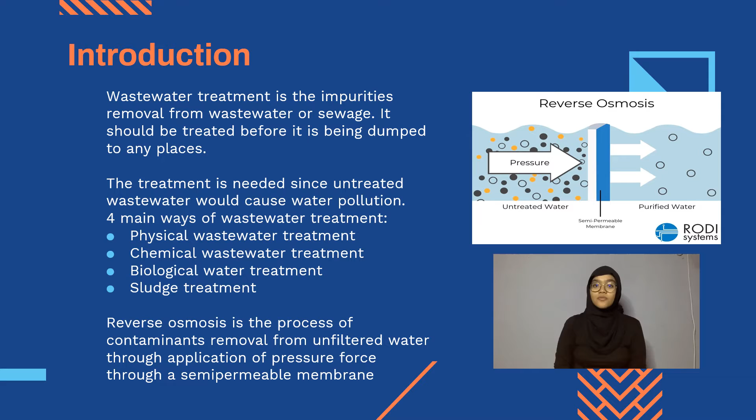Reverse osmosis is the process of removing contaminants or impurities from unfiltered water through the implementation of pressure forces through a semi-permeable membrane. In reverse osmosis, the water will flow from the concentrated side of the membrane, which contains more impurities, to the less concentrated side.

Hello, my name is Melan and I'm going to talk about the problem statement and the objective. The objectives are to study the type of control system used in this reverse osmosis process, to study the challenges faced in this process control, and to study the recommendations that could be applied in the control system used in this process.

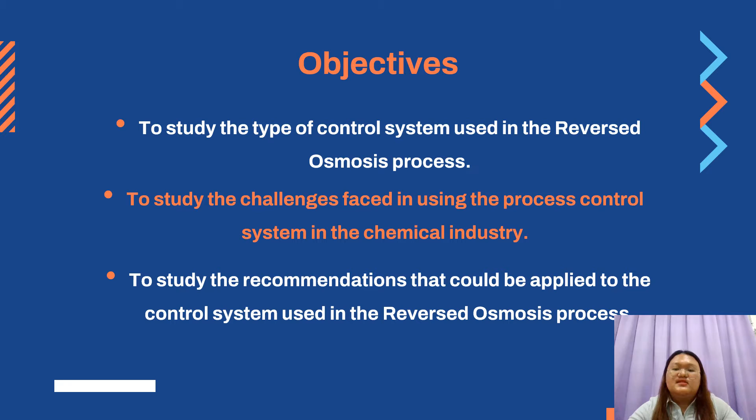Hi, my name is Darren Arvin and I will be explaining the control system part. The system that will be used is the pressurized recycle reverse osmosis system. This system is an alternative to replace the original design of the reverse osmosis system. Now, why don't we use the original design? This is because the existing design lacks any kind of automation, as all operations are done by hand.

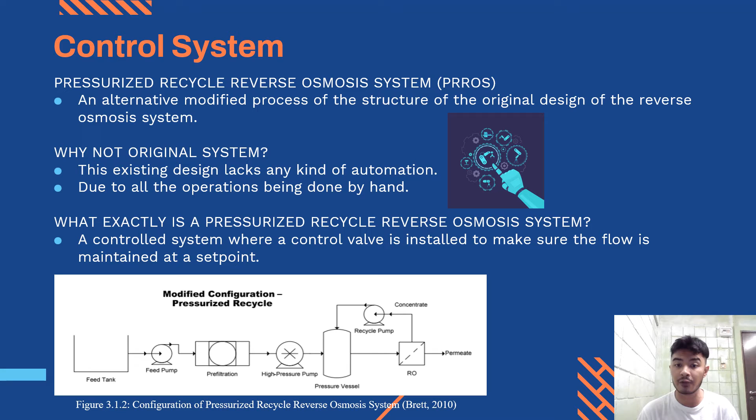A pressurized recycle reverse osmosis system is a system where a control valve is installed to make sure the flow is maintained at the set point. There are three objectives of this control system. The first one is the flow rate is to be controlled such that a minimum residence time of 5 minutes through the adsorbent media is maintained.

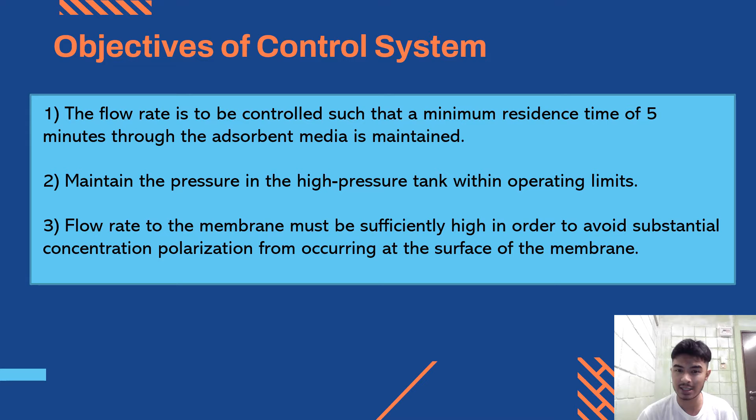The second one is to maintain the pressure in the high pressure tank within operating limits. And the third one is the flow rate to the membrane must be sufficiently high in order to avoid substantial concentration polarization. Moving on to the steps involved in the system. The first step is raw water is pumped through a wire strainer to remove big particles. The second step is the de-oiled water is then passed through a high pressure pump.

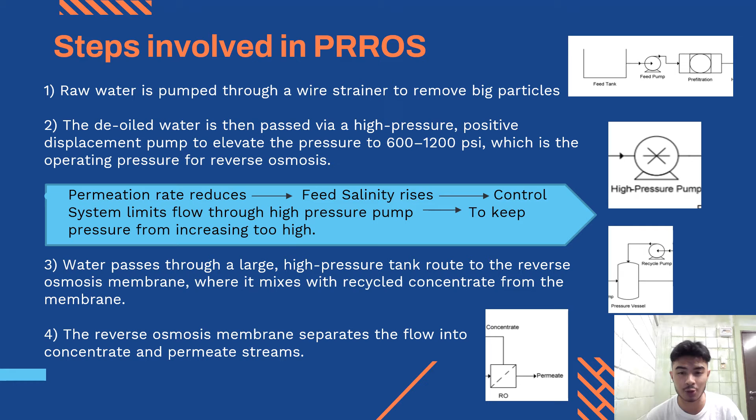Here, the control system takes action. When the permeation rate reduces, the feed salinity rises, which causes the control system to limit the flow through the high pressure pump. This is to keep the pressure from increasing too high. The water then passes through a large high-pressure tank routed to the reverse osmosis membrane, where it mixes with the recycled concentrate from the membrane. And the last step is the reverse osmosis membrane separates the flow into the concentrate and the permeate streams. The concentrate is usually recycled back to the pressure vessel.

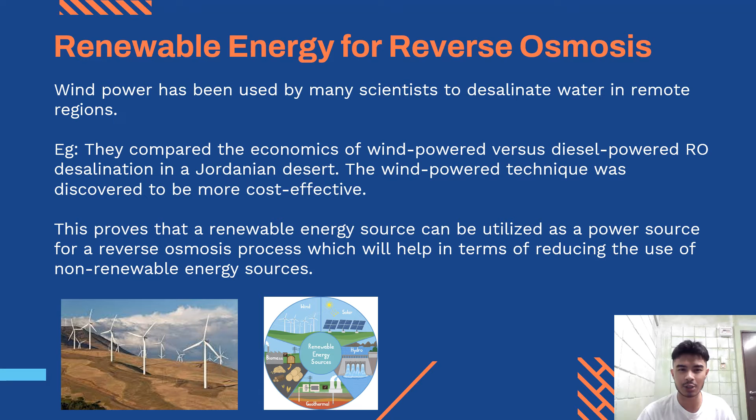Now, moving on to the next section, renewable energy for reverse osmosis. Wind power has been used by many scientists to run a reverse osmosis system. For example, they compared the economics of wind-powered versus diesel-powered reverse osmosis systems, and the wind-powered technique was found to be the most cost-effective. This proves that a renewable energy source can be utilized as a power source for a reverse osmosis process. This will help in terms of reducing the use of non-renewable energy sources.

Hello, my name is Aloysius and I'll be focusing on the challenges of reverse osmosis. According to Davenport et al. 2021, the development of RO presents a myriad of challenges. When the operation is conducted at ultra-high pressures, the RO system is prone to system leakage, whilst the salt solution easily causes metal corrosion. Another typical problem with reverse osmosis systems is membrane fouling and scaling, which occurs when materials accumulate on the membrane and slow down the flow of water.

Besides that, the RO system often experiences loss of normalized permeate flow and increase in normalized salt passage. This occurrence is often due to factors such as faulty gasket interconnectors, membrane surface abrasion, and membrane layer oxidation, which then inherently affects the water quality.

Another challenge is cost and sustainability. The complex nature of a very big SWRO plant in a larger system, which relates to the amount of area demanded and the number of components, is extremely costly and increases the carbon footprint. This, coupled with a huge water consumption, may be detrimental to our water reserves, and it is definitely not sustainable for our environment.

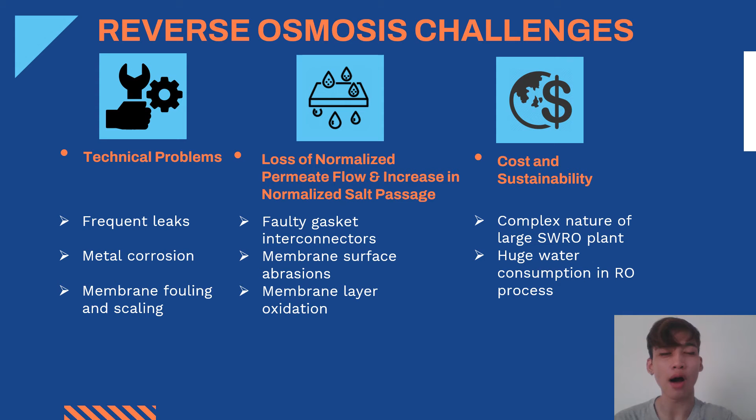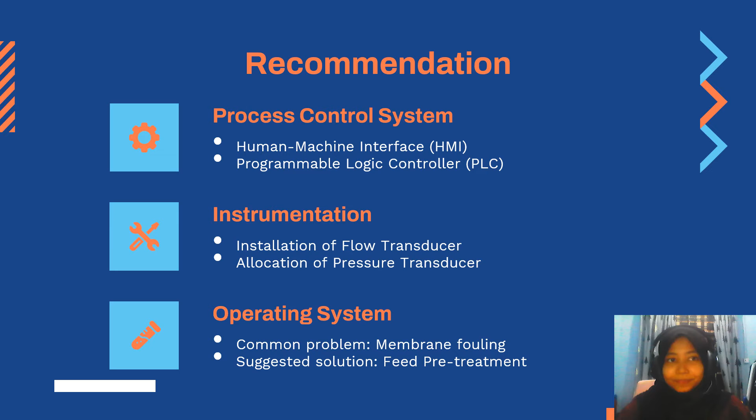Hello, my name is Nur Awada, and now I will talk on the recommendations for the reverse osmosis system from the point of view of the process control system, instrumentation, and the operating system. For the process control system, HMI and PLC can be installed as a safety control system to prevent leakage, failure or any issues in the system which require immediate action by the operator. It will monitor input and output states continuously, and it is equipped with safety alarms to notify or alert the operator when there is any issue in the system. Thus, it will increase the safety rate of the entire system.

Next, for the instrumentation, the installation of a flow transducer will allow accurate flow rate and pressure readings, which is critical to monitor the performance of the membrane elements. And the pressure transducer should not be located directly downstream of the throttle valve to prevent the aspiration effect, which might affect the accuracy of the pressure readings. Modifying the system in this aspect will increase the system accuracy.

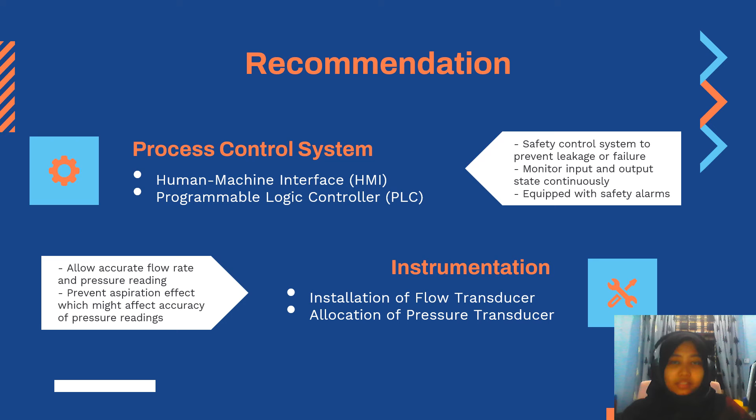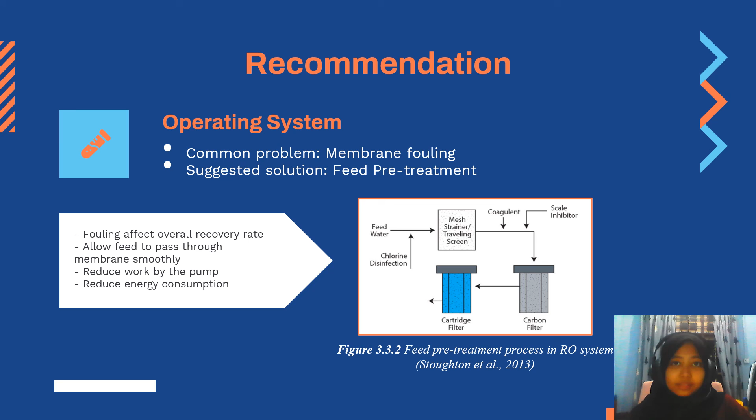In conclusion, our group has successfully analyzed the wastewater treatment for the reverse osmosis process in this report. Hence, all the objectives have been achieved. Overall, this project helped expose us to the importance of wastewater treatment.